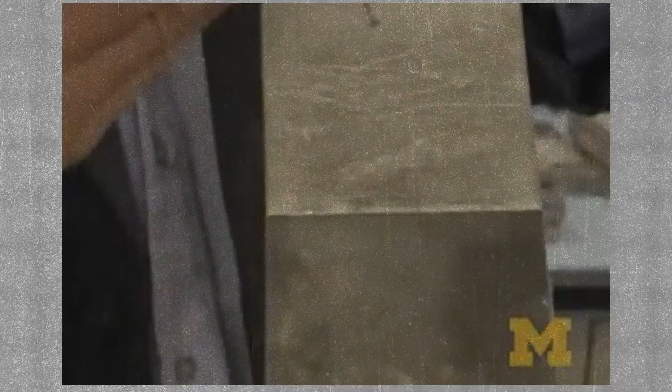So we have developed self-healing concrete. This is a concrete which, when damaged, can reheal itself. The concept of self-healing materials emerged. So can we turn the non-living concrete all around us into living systems?

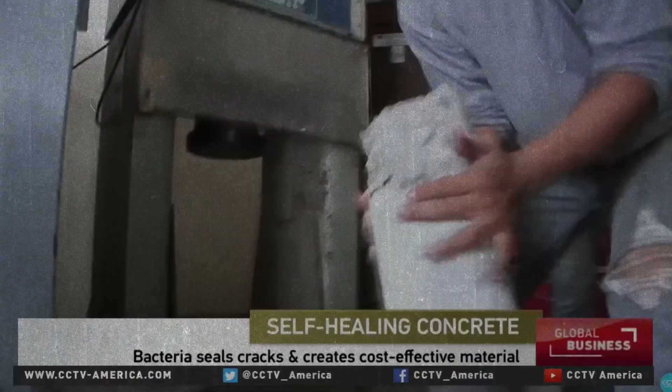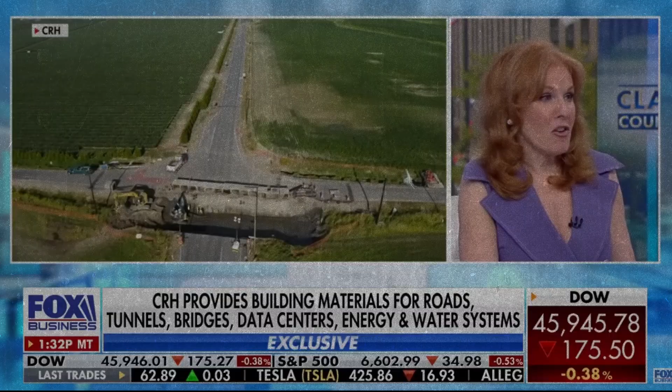What about self-healing concrete? We were talking about that in our morning meeting. And I mean, when I heard about this, I said, wait a minute, what? There's a crack and then it naturally heals? Do you guys make that? We do, yeah, absolutely. A thin crack on a bridge or basement wall is easy to ignore.

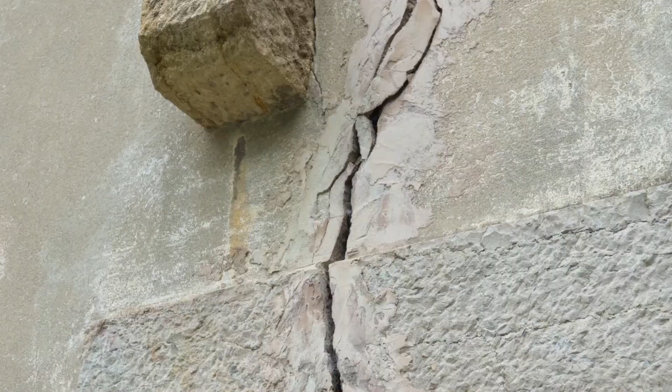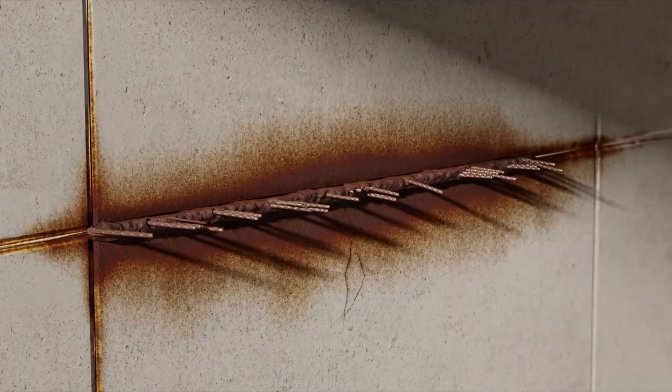It looks like a pencil line. But that tiny line is often the first step in a long, expensive chain. Water gets in, winter freezes it, metal inside starts to rust, and the crack slowly grows. In the United States, the American Society of Civil Engineers, also called ASCE, has been sounding the alarm for years. In its 2025 Infrastructure Report Card, released on March 25, 2025, it frames aging systems as a national challenge.

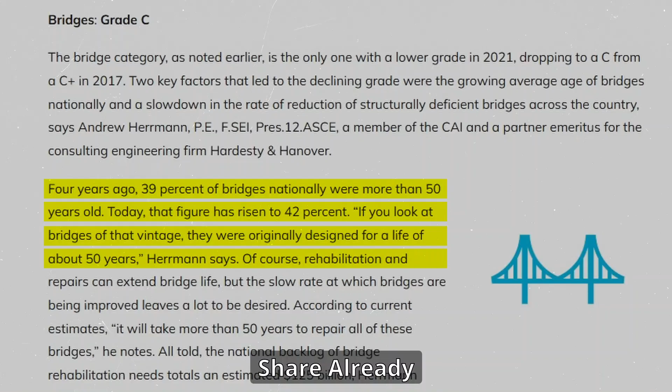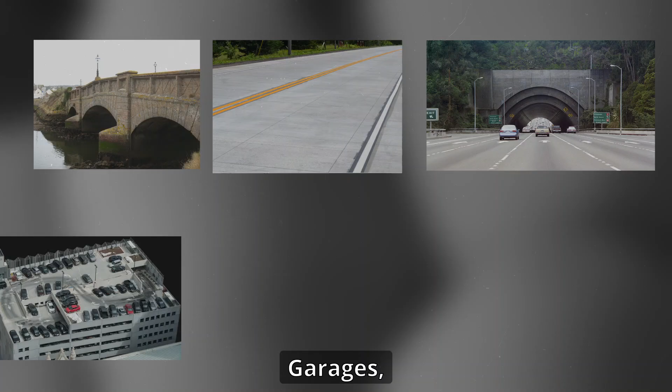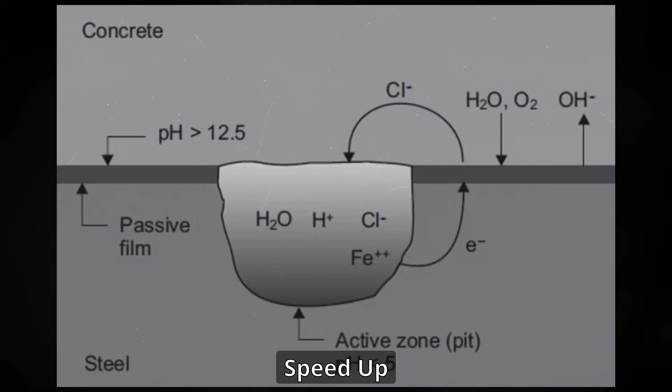In the bridges category, it notes an average bridge age around 44 years, with a large share already 50 years or older. That matters because concrete structures are not meant to be set and forgotten forever. And it's not just bridges. Concrete roads, tunnels, parking garages, seawalls, and apartment blocks all fight the same enemy: tiny openings that let water and salts called chlorides travel deeper than they should. Once that happens, the damage can speed up quietly under the surface.

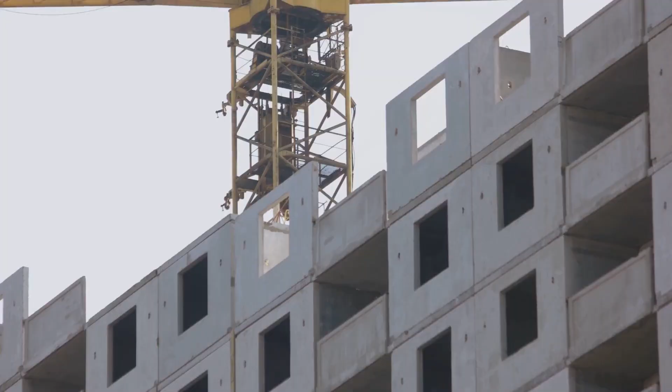Concrete is strong when you squeeze it, but weak when you pull it. So cracks are not rare accidents. They're a normal part of concrete's life, caused by shrinking as it hardens, heat and cold cycles, heavy loads, or ground movement. Here's the scary part. A crack is not just a line, it's a doorway.

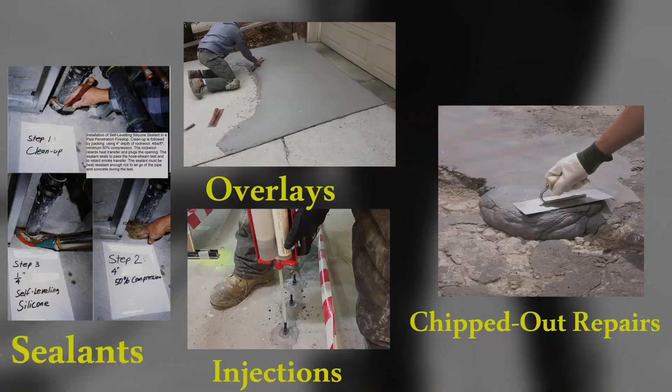When water and salts reach the steel bars inside reinforced concrete, that steel can corrode. Rust takes up more space than the original steel, pushing outward and cracking the concrete cover, which can lead to hidden separation and spalling, meaning chunks can break off. So engineers keep patching. Sealants, overlays, injections, chipped out repairs, again and again. The work is real, but it often feels like treating symptoms, not the disease.

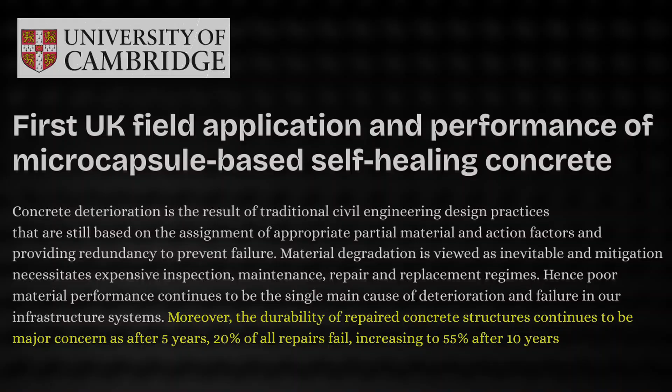Some reports suggest even good repairs don't always stay good. In one UK review cited by researchers, about 20% of concrete repairs failed after 5 years, rising to 55% after 10 years. Those numbers help explain why engineers dream of materials that reduce the need for repeated patchwork.

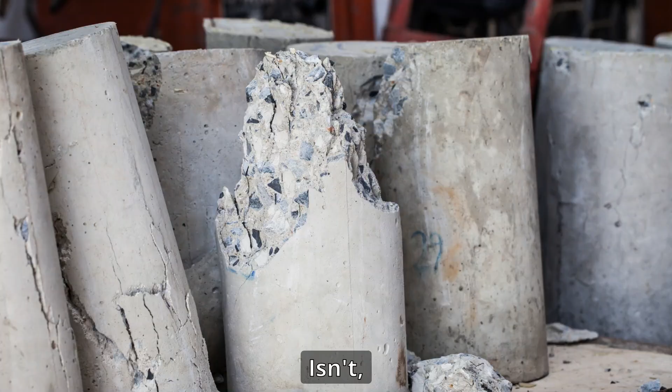Now the big question, the one that sounds like science fiction but isn't. What if the material could do some of that repair by itself? What if concrete and polymers could respond to damage the way skin responds to a cut? First twist, ordinary concrete can sometimes heal small cracks on its own. Researchers call this autogenous healing. It means the material uses its own leftover chemistry to close tiny gaps, especially if water is present.

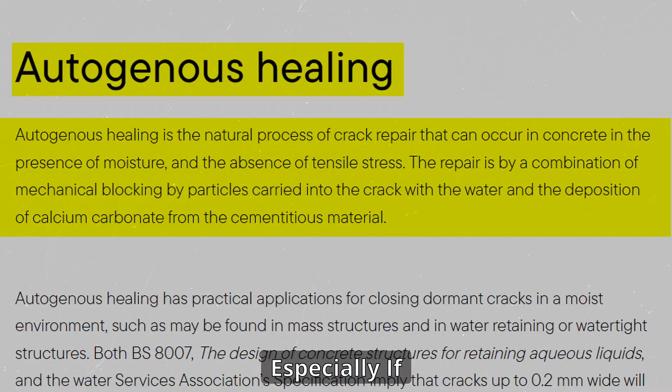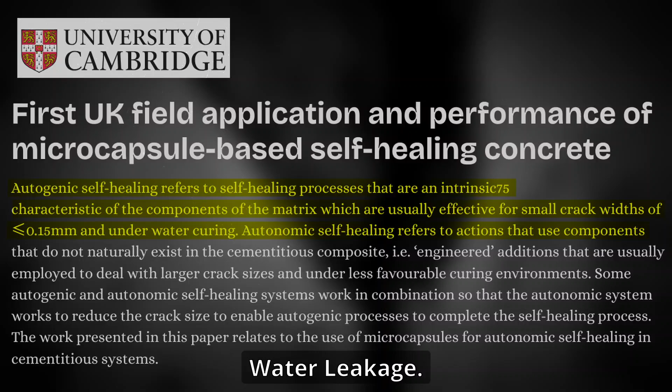In lab and field studies, tiny often means hairline cracks around 0.15 millimeters wide or less, where minerals can gradually fill the gap and cut down water leakage. Wider cracks usually need extra help. One way it happens is continued hydration. Not all cement particles react on day one. If water later enters a microcrack, some unreacted cement can hydrate and create new solid material inside the crack.

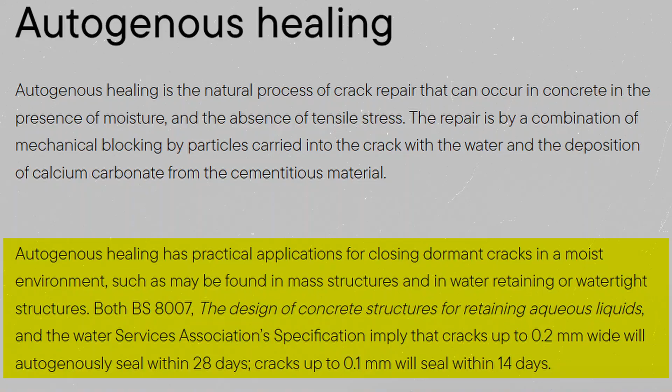Another way is carbonation. Dissolved calcium from the cement reacts with carbon dioxide in water and forms calcium carbonate, a stone-like mineral that can fill part of the crack and improve water tightness. But there's a limit. Autogenous healing works best for very small cracks, and it depends on the right moisture conditions. If a crack keeps opening and closing or gets too wide, concrete's natural self-repair usually can't keep up.

That limit is where the new idea begins. Don't hope for healing, design for healing. Give the material tools to fix itself, the way your body uses clotting, scabs, and rebuilding tissue.

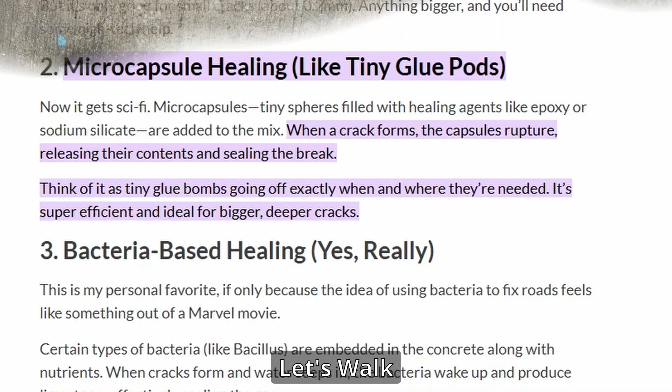Engineers have tried many paths, but most fall into a simple trio: release a glue when a crack forms, grow a filler inside the crack, or keep cracks so tiny that nature finishes the job. Let's walk through them like a story, because each one solves a different part of the same mystery. How do you stop a crack from becoming a collapse?

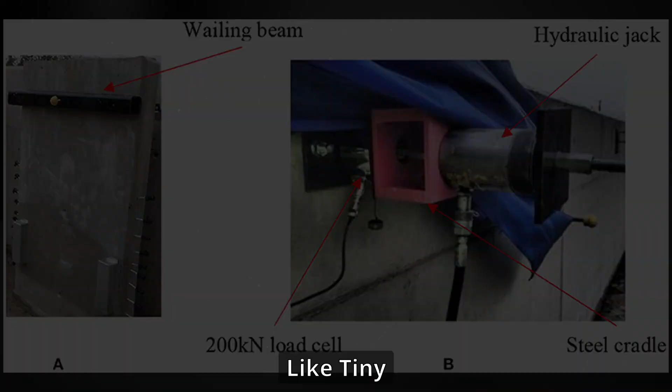One approach is to hide small containers in the material, like tiny bandages waiting for an injury. When a crack cuts through, the container breaks and releases a healing agent that fills the gap and hardens. This capsule idea became famous in polymers first. A classic experiment used microcapsules filled with a liquid resin. When a crack formed, the resin flowed out and cured, restoring strength in test samples.

Concrete versions swap resin for things that make sense in cement, mineral agents, or chemicals that create solid products inside the crack. Some designs also use small tubes or vascular channels, so fresh healing agents can be supplied more than once, like a tiny blood vessel network.

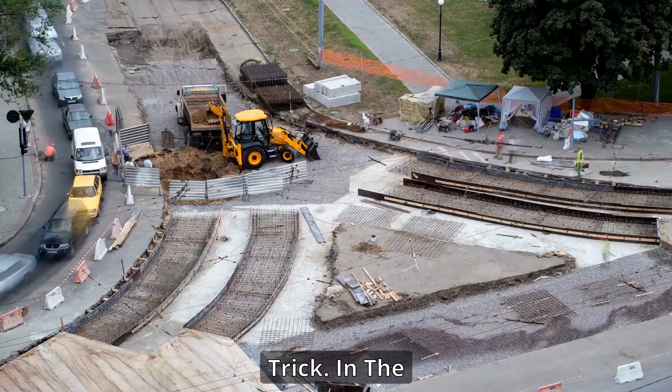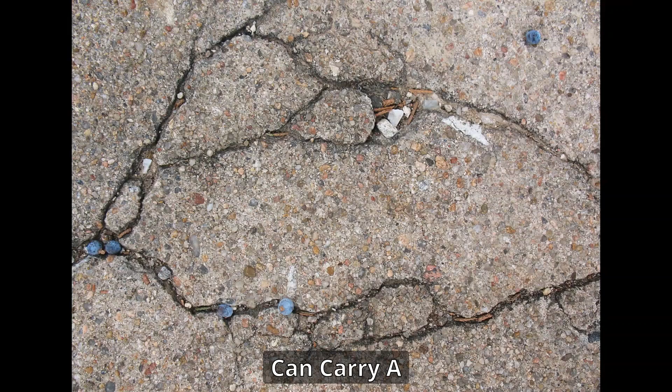This is not just a lab trick. In the UK, a research team built full-size trial panels for a road project at the A465 Heads of the Valleys Highway upgrade. Their site trial used 5 panels and tested multiple self-healing techniques, including capsule-based systems and a vascular flow network. If you're used to the idea that concrete is dead, this is the mind bender. The concrete can carry a repair supply, and the crack itself becomes the trigger that releases it.

Method 2 sounds even wilder. Add bacteria spores to the concrete. Spores are like seeds. They can stay dormant for a long time, then wake up when conditions are right. In bacteria-based self-healing concrete, the goal is simple. When a crack lets water in, the bacteria become active and help form calcium carbonate, often called calcite. That calcite can seal the crack, especially for small crack widths.

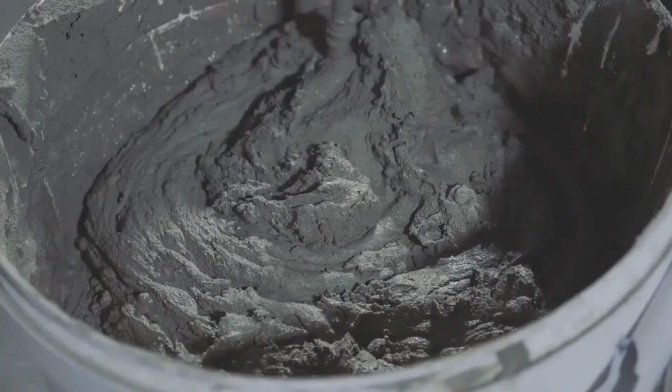To make it work, the system needs a safe home for the bacteria and a food source. Researchers have explored ways to protect spores inside porous particles and include nutrient compounds so the bacteria can form mineral filler when cracks bring in water. And this idea has moved beyond jars and test blocks. Commercial pilots exist too. For example, the company Basilisk publishes case studies of using a liquid repair system to reduce leakage from many shrinkage cracks in real concrete structures, including a parking garage pilot.

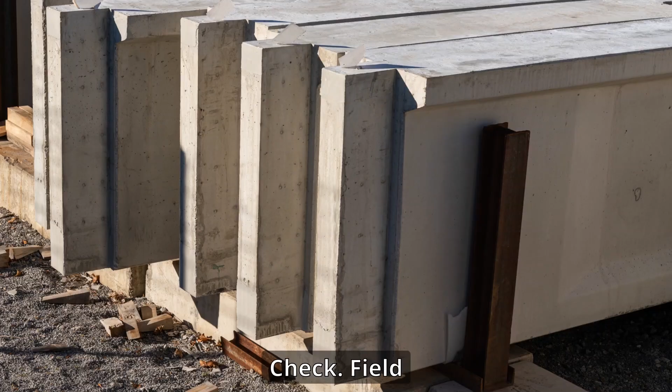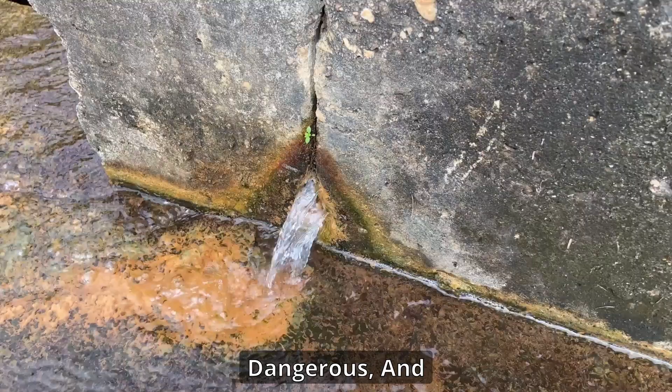Here's an honest reality check. Field trials are messy. In the A465 trials, the researchers talk openly about challenges and the need for improvements while moving from lab samples to real construction. That's normal in civil engineering, because the weather, the loads, and the cracks never follow a neat script. Still, the promise is huge for one reason: water. Water is the thing that makes cracks dangerous, and water is also the trigger that could start the repair.

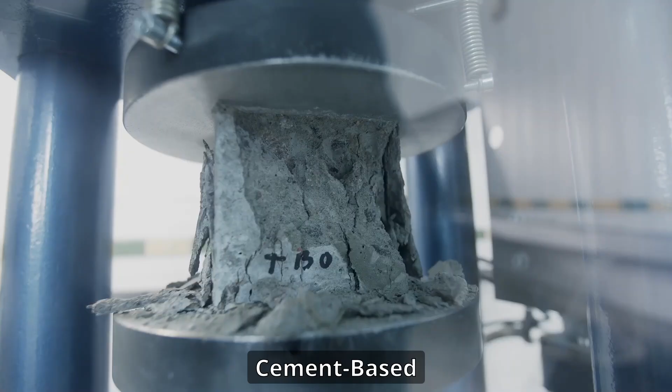The third method is sneaky. Instead of focusing only on filling cracks, it tries to change how cracks form in the first place. Some cement-based composites, like engineered cementitious composite, also called ECC, are designed to spread strain across many tiny microcracks instead of one big crack. Because the cracks are so small, they can seal more easily through natural healing processes.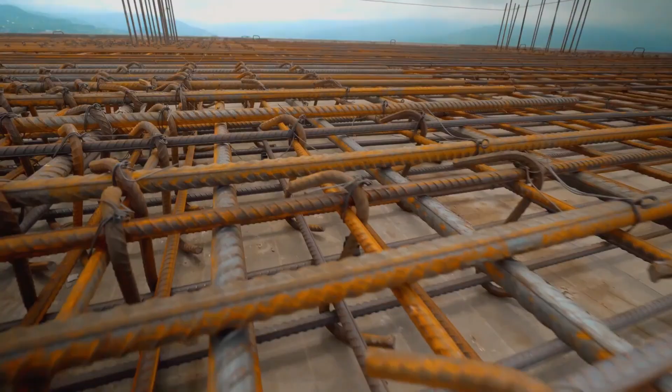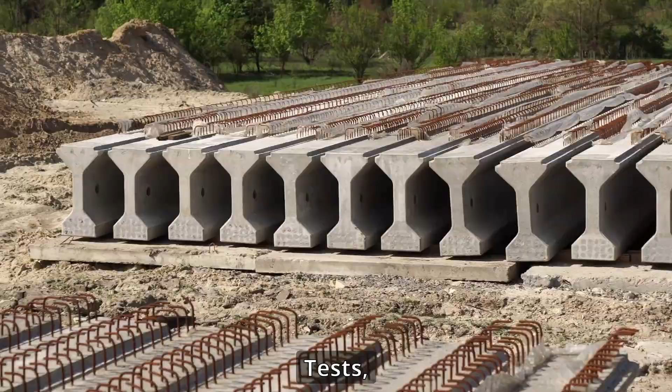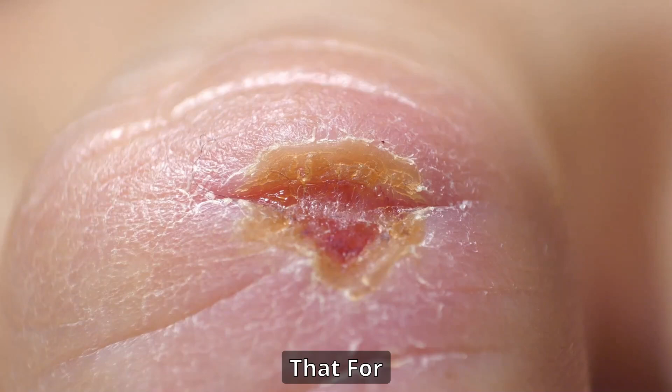This is not only theory. The University of Michigan describes the use of bendable concrete, meaning ECC, on a bridge deck project, pointing to it as a real-world use case rather than a lab-only material. In tests, researchers have measured self-healing behavior in ECC, looking at how tight microcracks can close and how water tightness can recover after cracking. Think of it like this. If you can keep the wound tiny, the body's natural healing works better. ECC tries to do that for concrete. Control the crack so it never becomes a wide-open path for water.

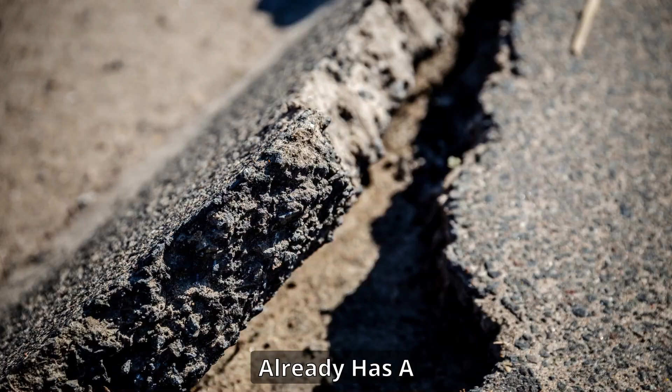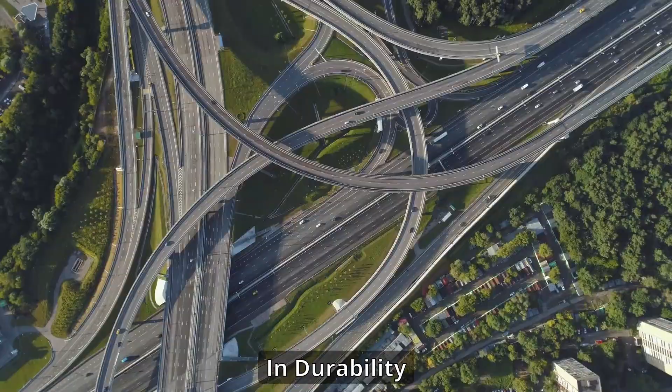Concrete gets most of the attention, but roads have their own self-healing story. Asphalt already has a natural ability to heal small cracks when it gets warm because its binder can flow a little. The scale is hard to picture. One review notes the global road network spans about 16.3 million kilometers. When maintenance happens on that scale, even small improvements in durability can ripple into fewer repairs and fewer disruptions.

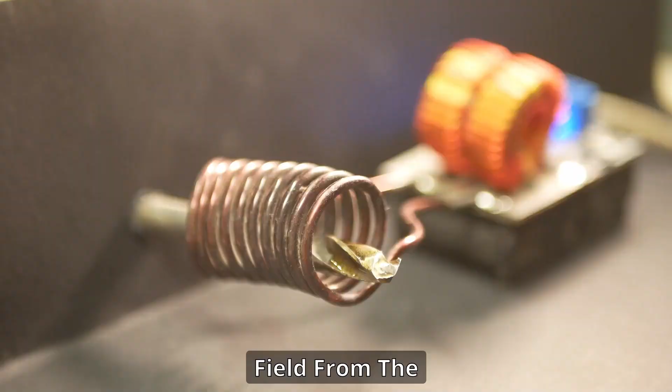The problem is timing. Traffic loads crack the road every day, and cold weather makes the binder stiff. So researchers have explored ways to trigger healing on purpose at the right moment before cracks grow. One method is induction heating. Mix in metallic fibers, then apply an electromagnetic field from the surface. The fibers heat up, warming the binder near the crack so it can flow and close gaps.

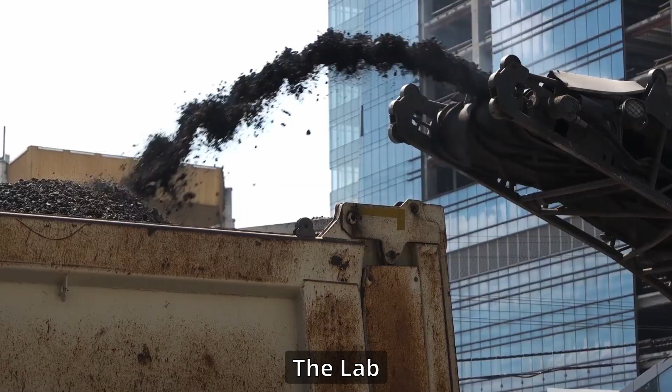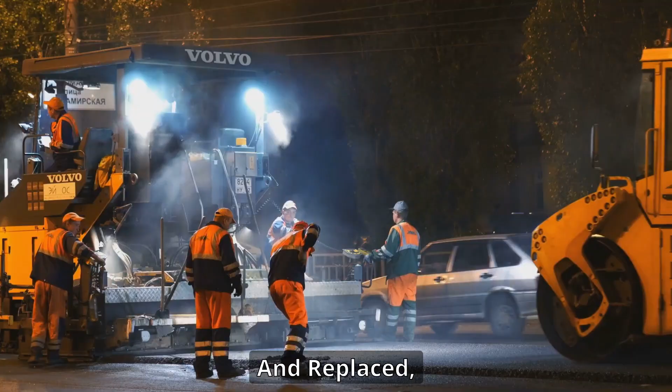A transportation research report in Louisiana tested this idea in the lab with a road surface mix that included up to about 5% metallic fibers by weight, then applied induction heating to damaged specimens to stimulate healing. The bigger message is the same. If you can slow crack growth, you buy time. You delay the day when a road must be milled and replaced, and that means fewer closures, less noise, and fewer nights of orange cones.

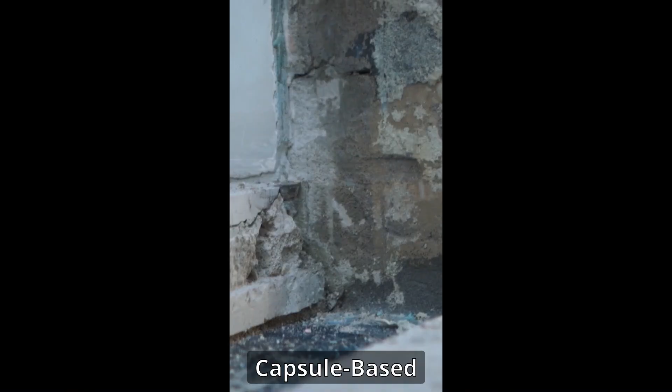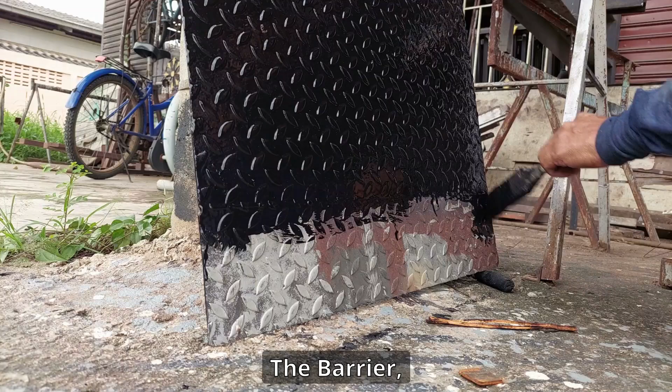Now zoom out from concrete. Many buildings rely on polymers too. Paints, coatings, sealants, and composites. And in polymers, self-healing has become a huge field with both capsule-based systems and chemistries that can reconnect after damage. A key reason coatings matter is corrosion. If a protective coating gets scratched, the bare surface underneath can start reacting with air and water. Self-healing coatings aim to close those microcracks and restore the barrier, sometimes with heat, light, or moisture as a trigger.

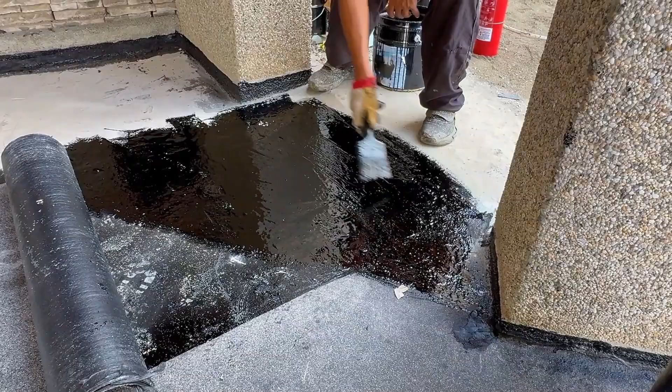This matters for infrastructure because we often protect steel and concrete with layers, paints, membranes, sealers. If the outer layer can fix itself after small damage, the whole system may last longer. Here's the deeper reason self-healing materials have become so hot. We are building and maintaining at the same time. Many major structures built decades ago are now aging together, while traffic loads and climate stress keep rising.

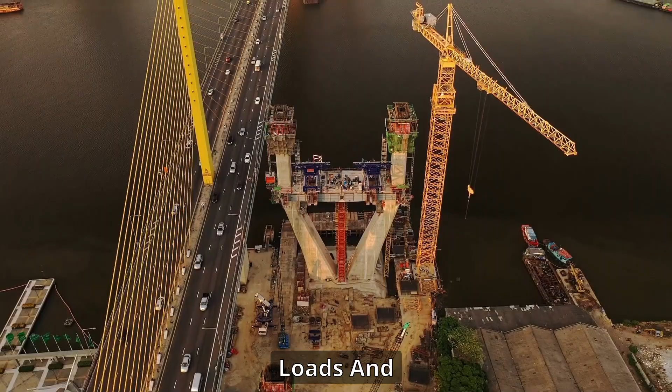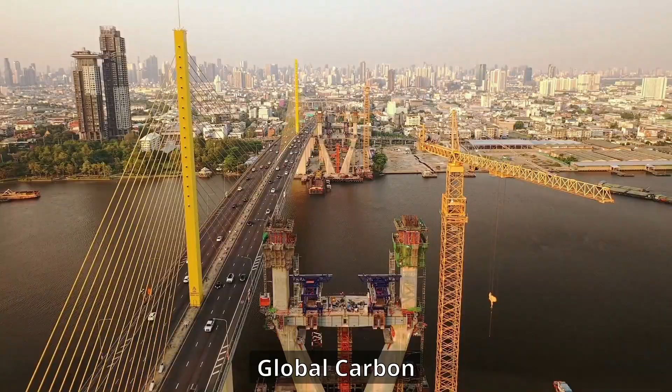There's also the climate and cost side. Cement production is carbon intensive, and some research estimates cement accounts for roughly 7 to 8% of global carbon dioxide emissions. If structures last longer, we can reduce the need to pour and replace as often. That doesn't mean self-healing concrete saves the planet by itself. It means engineers are looking for a full toolbox, better design, better materials, smarter maintenance, and maybe materials that do some maintenance on their own.

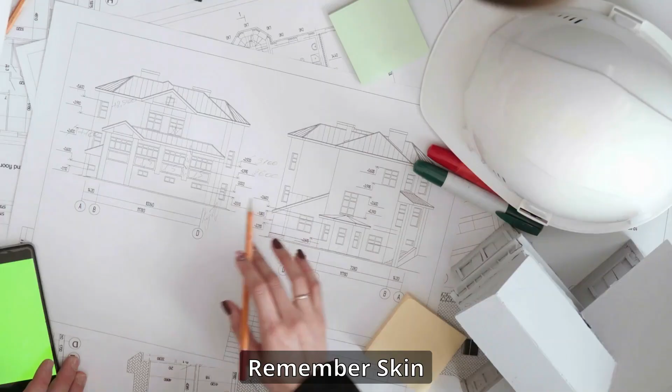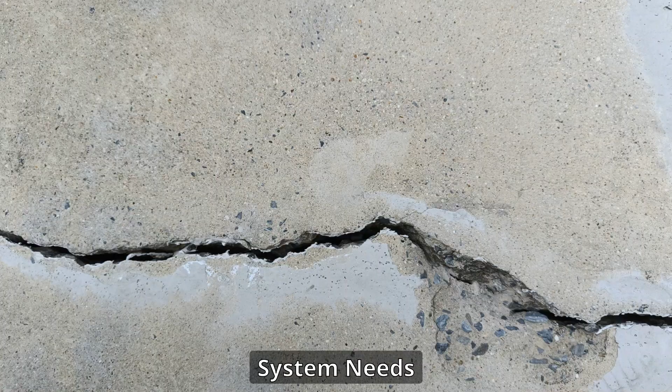If this sounds like magic, remember, skin heals because it has energy, blood flow, and a living system that can keep working. Concrete is not alive, so every self-healing approach has limits, and those limits matter more than the headlines. Crack size is a big one. Many self-healing methods are aimed at small cracks because small cracks are the cracks that quietly cause long-term durability problems by letting water in. Another hard part is repeatability. A capsule can break once. A bacterial system needs the right moisture and nutrients. A vascular system must survive construction and decades of service. Field trials like the A465 panels are valuable because they reveal those real-world challenges.

And then comes standards and trust. Engineers don't just need a cool demo, they need test methods, design rules, and long-term performance data. That's slow work, but it's the only way new materials become normal materials. So when will buildings heal like skin? The honest answer is in pieces. We already see field trials and pilot applications. We already use crack control strategies, and we already depend on coatings and overlays that are getting smarter.

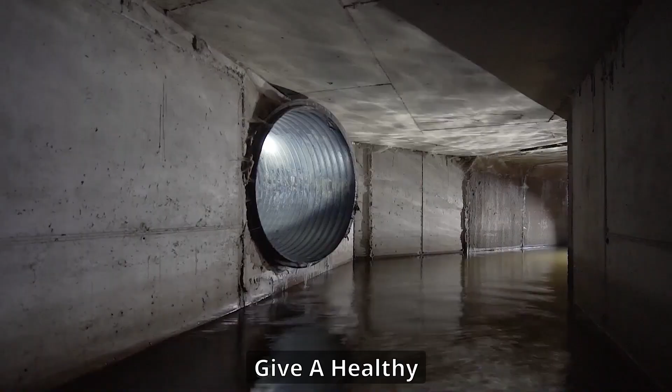The near future is likely a hybrid, concrete that manages cracks better, plus targeted self-healing features where water tightness matters most, like tunnels, basements, marine structures, and bridge decks. And one day, the best compliment you could give a bridge might be the same compliment you give a healthy body. It took damage, it repaired itself, and you never even noticed.